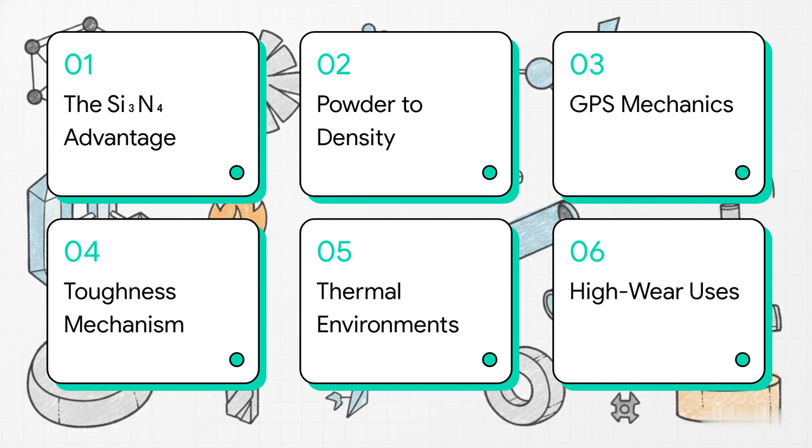Okay, so here's our roadmap for today. We have a lot of ground to cover. We'll be taking this material all the way from its bottom-up chemical synthesis to how we achieve densification, the gas pressure sintering mechanics, its unique microstructure, and finally, how it dominates in extreme thermal and high-wear industrial applications. Let's dive right in. Starting things off with Section 1, the silicon nitride advantage.

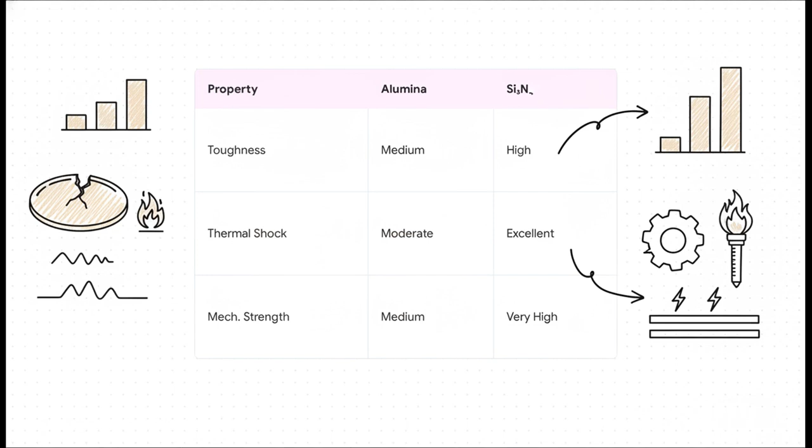Let's set a baseline here. We all know traditional structural ceramics basically hit a wall when pushed to their limits under extreme mechanical and thermal stress. Think about standard industry alternatives, right? Like alumina or zirconia. Alumina might give you medium toughness, and sure, zirconia offers decent strength, but when you compare them to silicon nitride, the differences are honestly staggering. Silicon nitride delivers excellent thermal shock resistance, and its mechanical strength jumps to very high. It doesn't just compete with the standard options, it fundamentally outclasses them in pure endurance.

Now here's another massive advantage for this team: superior machining damage tolerance. In your world, precision is literally everything, and you need tight tolerances. Silicon nitride boasts significantly better machining damage tolerance and high-temperature reliability than both alumina and zirconia. What does that mean for you? It means when you're shaping these components for highly specific industrial geometries, they actually hold their structural integrity, instead of developing those annoying microscopic flaws that inevitably lead to catastrophic failure later on.

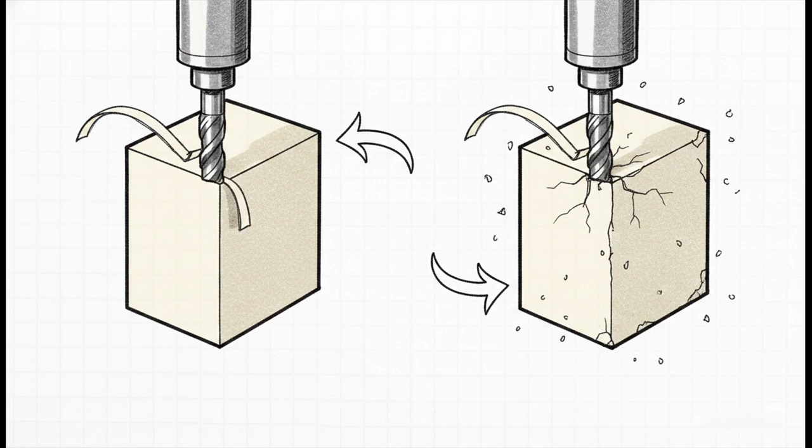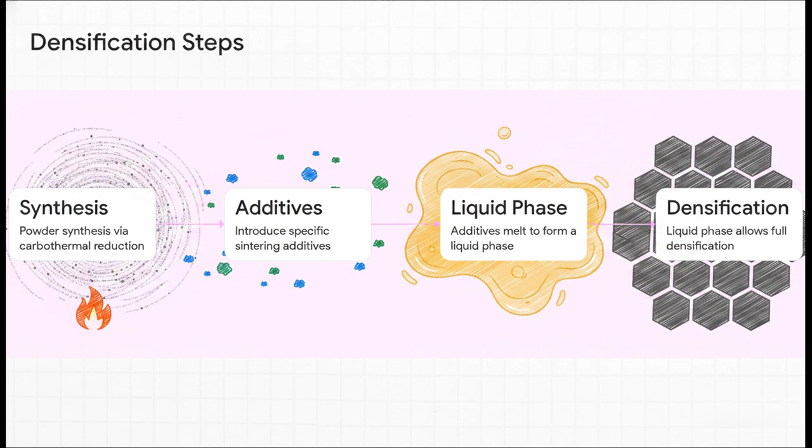Moving right along to Section 2, powder synthesis to densification. So how exactly do we get these crazy macroscopic properties? Well, we've got to look at the bottom-up engineering flow. The creation of a fully dense component follows a very strict sequence. It starts with powder synthesis, often using carbothermal reduction. After that, we introduce highly specific sintering additives. Those additives melt to form a liquid phase, which finally allows the ceramic to achieve full densification.

Let's zoom in on those additives for a second, because honestly, they are absolute game changers. Silicon nitride all by itself is notoriously stubborn to densify, but by adding sintering aids, things like yttrium oxide, aluminum oxide, magnesium oxide, or even various rare earth oxides, we fundamentally change the game. These additives form liquid phases at super high temperatures. It's this liquid phase that basically pulls the particles together, enabling full densification. Without them, you'd just be left with a porous, weak block of material.

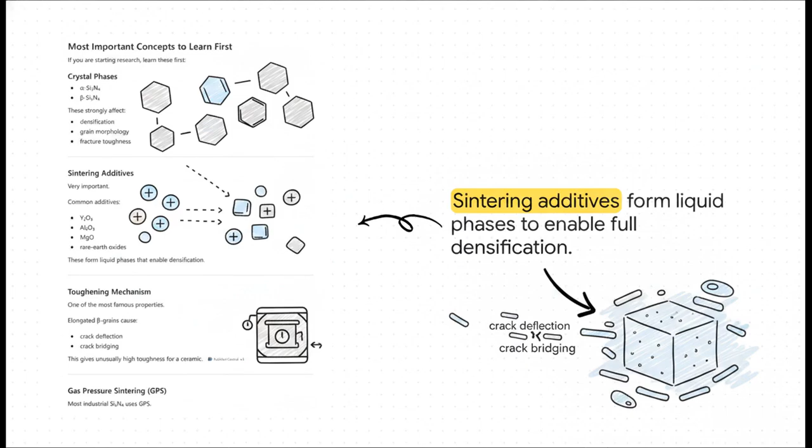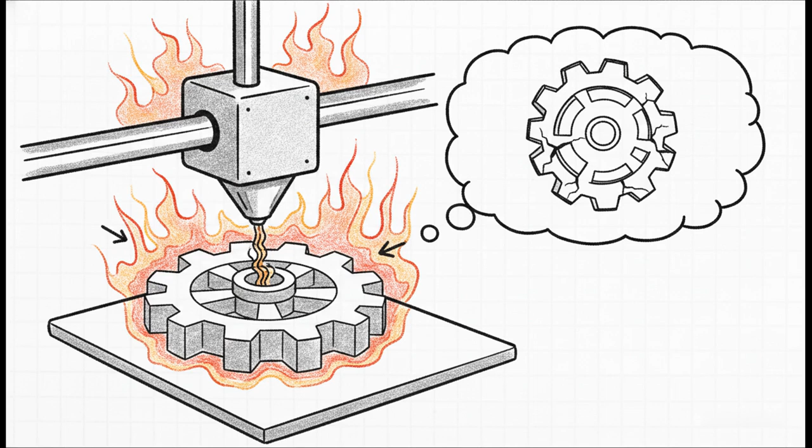But, of course, translating this into modern fabrication methods, like additive manufacturing or 3D printing, brings some real headaches. The material's covalent bonding and low self-diffusion mean you need incredibly high sintering temperatures. And because of that, strict shrinkage control is absolutely vital during densification. If you can't control that shrinkage, you completely lose the precise structural geometries your engineering team just spent weeks designing.

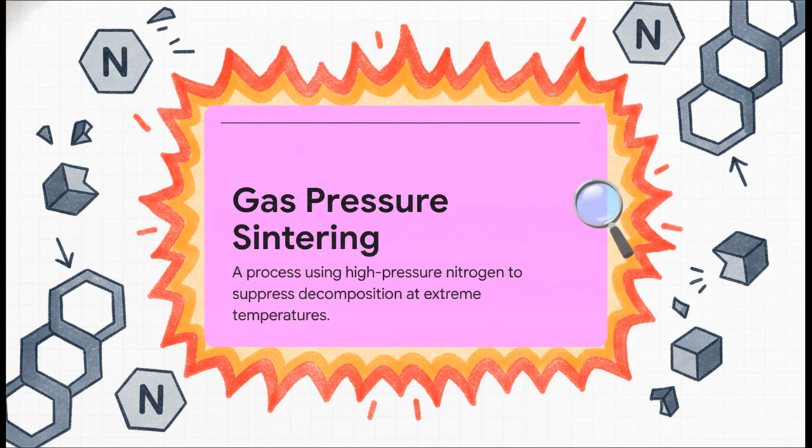Which brings us to Section 3, gas pressure sintering mechanics. So, how do we actually clear those high-temperature hurdles for commercial viability? Well, most industrial silicon nitride relies on a process called gas pressure sintering, or GPS. Here's the catch. At the extreme temperatures required to densify, silicon nitride actually wants to decompose. By applying a high-pressure nitrogen atmosphere, GPS essentially forces the material to stay intact. It completely suppresses that decomposition while it reaches maximum density.

And the payoff for using this specific sintering process? It's exactly what your structural engineers are begging for. GPS allows us to achieve incredibly high density and outstanding mechanical properties. We aren't just throwing around buzzwords here. This is validated by rigorous flexural strength data and a very high Weibull modulus. That means its failure rate is highly predictable and incredibly reliable.

In short, GPS guarantees the absolute structural integrity you need for your critical zero-failure parts.

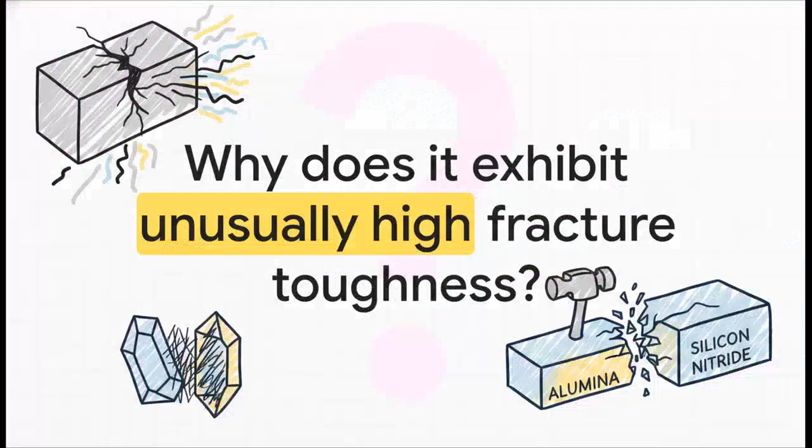All right, Section 4, microstructure and fracture toughness. We've talked about how it's made, but I want to pose a question directly to the team to understand its internal secret sauce. We all know ceramics are brittle by nature, right? It's just a fact. So why does this specific ceramic exhibit such unusually high fracture toughness? How on earth does it survive impacts and mechanical stress that would just shatter alumina or zirconia into a million pieces? Well, the answer lies entirely in its crystal structure.

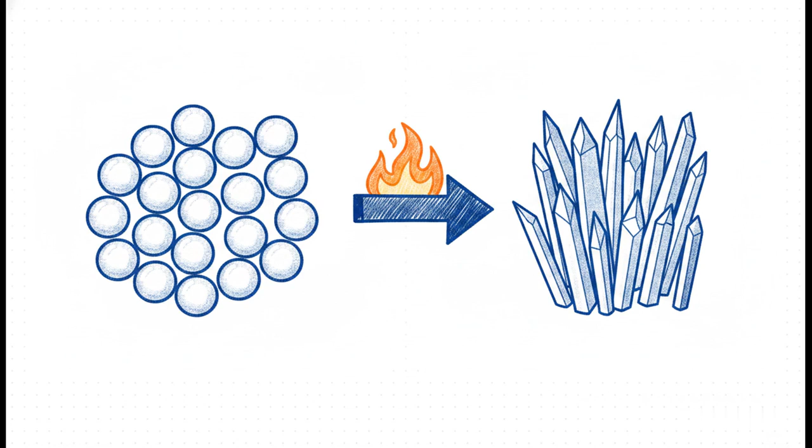Silicon nitride exists in two vital phases. First, you have the alpha phase, which dictates the initial densification. But during that high-temperature sintering process we just talked about, there's a crucial phase transformation. The material literally shifts from the alpha phase to the beta phase. And it is this beta phase that dictates the grain morphology and ultimately the final incredible toughness of your engineered component. As it makes that shift into the beta phase, it forms these unique, elongated, needle-like beta grains.

Think of these acting like microscopic rebar inside concrete. When a crack tries to form and propagate through the ceramic, these elongated grains physically block it. They cause what we call crack deflection, forcing the fracture to actually change direction and lose its energy, and crack bridging, physically holding the material together. This is the toughening mechanism that gives silicon nitride its almost unheard-of durability for a ceramic.

Let's switch gears to Section 5, dominating extreme thermal environments. Let's look at the macro scale now, 1400 degrees Celsius. Just wrap your head around that for a second. That is hotter than volcanic magma. And this isn't some theoretical laboratory number. This is the reality of extreme thermal environments, like industrial furnaces and molten metal processing. Silicon nitride doesn't just survive here. It operates flawlessly, without catastrophic failure, even under immense thermal shock.

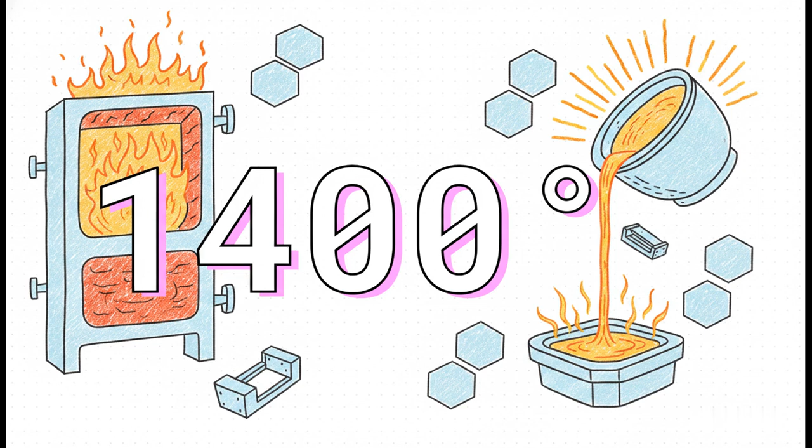Inside these crazy environments, silicon nitride essentially plays two main roles. First, as thermal system components. Here, its primary job is functional, providing structural support right in the hot zones or facilitating heat transfer. Second, it's highly prized as custom insulating components. In this role, its specific job is to actively block heat transfer or provide electrical isolation, all while effortlessly maintaining its mechanical strength.

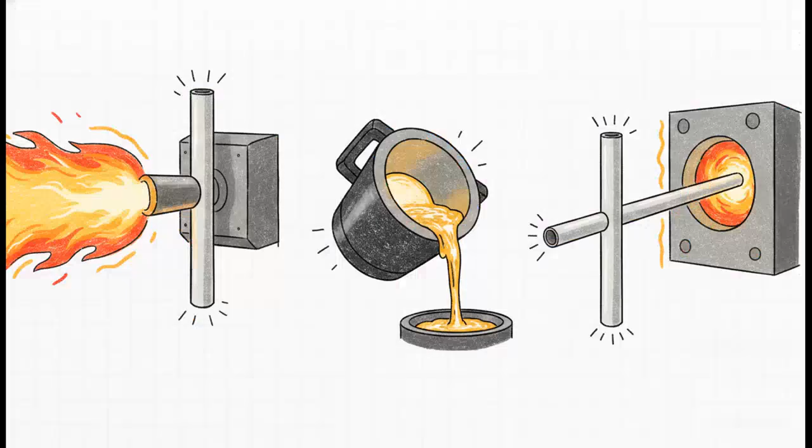So where do you actually use it? You're going to find silicon nitride totally dominating in induction heating fixtures, burner nozzles, thermocouple protection tubes, and molten metal handling. Why? Because it provides that essential thermal isolation and almost entirely prevents thermal cracking in systems that undergo brutal rapid thermal cycling. Where other standard materials just crack and degrade, silicon nitride stays completely stable.

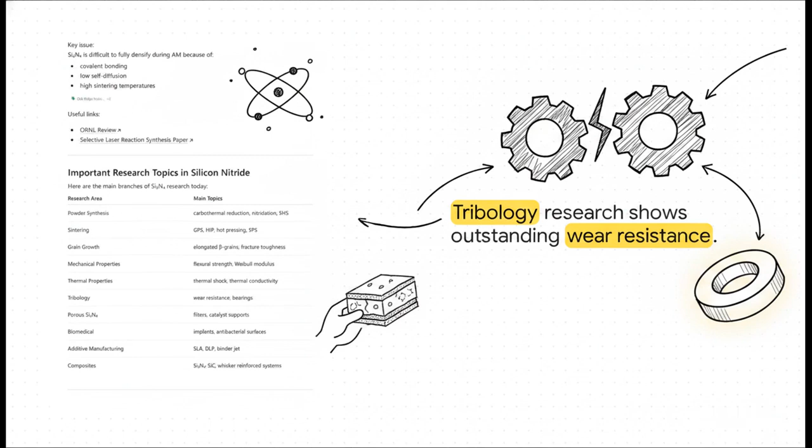And finally, Section 6, High-Wear Industrial Applications. Let's bring this pitch home because it's not just about the heat, it's about friction. The breadth of research on silicon nitride today is absolutely massive, but one of the most exciting areas is tribology, the study of friction and wear. Research consistently proves that these ceramics dramatically outperform standard alternatives in environments that demand extreme wear resistance.

For you guys, this translates directly to your heavy-duty applications. We're talking high-wear industrial bearings and precision cutting tools. That's where those elongated beta grains we talked about earlier step in to prevent catastrophic material failure under friction. It's also quickly becoming the absolute gold standard for EV motor insulation and semiconductor plasma equipment, where parts have to resist wear while providing perfect electrical isolation at super high temperatures.

So I want to leave the engineering team with this one final thought. We've seen the microstructural data, we've seen the extreme thermal endurance, and we've talked about the unparalleled wear resistance. If your current structural materials are failing under thermal shock, or if they're constantly cracking under mechanical wear, isn't it time to engineer your next critical component with silicon nitride? Seriously, it is time to stop constantly replacing failing parts and start building with the ultimate structural ceramic.